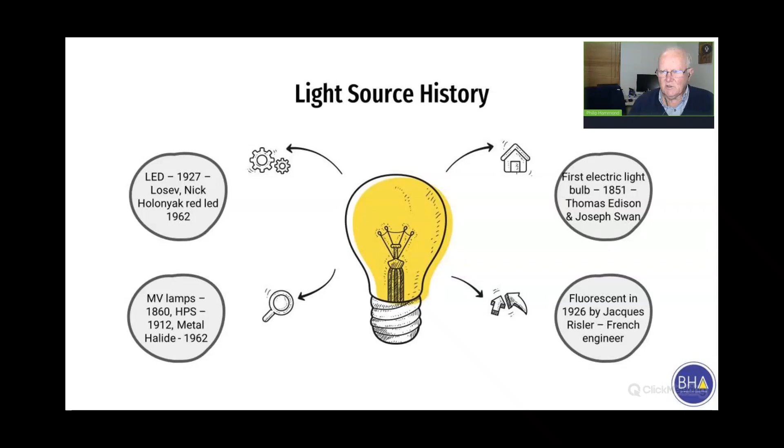And then it went on, and Nick Holonyak, who was working for General Electric at the time, he invented the red LED. And as you know, many of you have had little CD disc players and so on. You would remember that there was a little red laser light inside. And that is all thanks to Nick Holonyak. And that was in about 1962. Let's move on to the more modern history now.

We move on to light emitting diodes, or LED as we all fondly know it. The first modern LED was developed, it's a blue light, intrinsically blue light LED in its natural state before applying any phosphors to it, was invented by a Japanese gentleman, Shuji Nakamura, and it was shared with Akasaki Isamu and Amano Hiroshi, all Japanese material scientists. So, as material scientists, they invented the LED using certain chemicals to create it.

By 2010, the LED had reached the astounding efficacy of 100 lumens per watt. And everybody said, well, it wouldn't get much higher than that. Well, Philips broke through the 200 lumens per watt by 2015. But interestingly enough, good performance LED today in 2024 delivers around 150 lumens per watt.

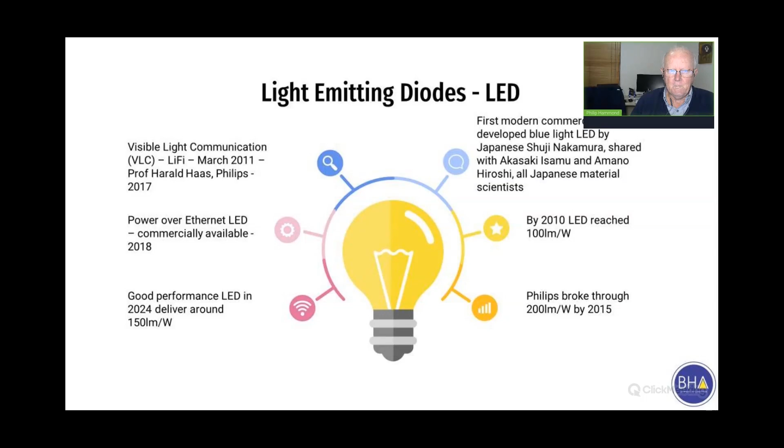So with all this in mind, and we're talking about energy efficiency, one of the reasons that we want to do it, and there's this drive to do it, is because of the energy costs. If you look back at 2021, which is only 3 years ago, the cost of electricity supplied by our utility in South Africa was R1.23 per kilowatt hour. Now, at that particular time, it was a lot less expensive than overseas. Overseas markets were paying much higher costs for energy.

And by this year, right now, energy cost is R2.61 per kilowatt hour. There are many tariffs because there's a lot of time of use, and it depends on whether you've got peak demand. So there are lots of variables in the cost. But through the experts and so on, I was able to ascertain that R2.61 is the current cost per unit or per kilowatt hour. So there's great motivation to save energy because it, in fact, helps our pockets.

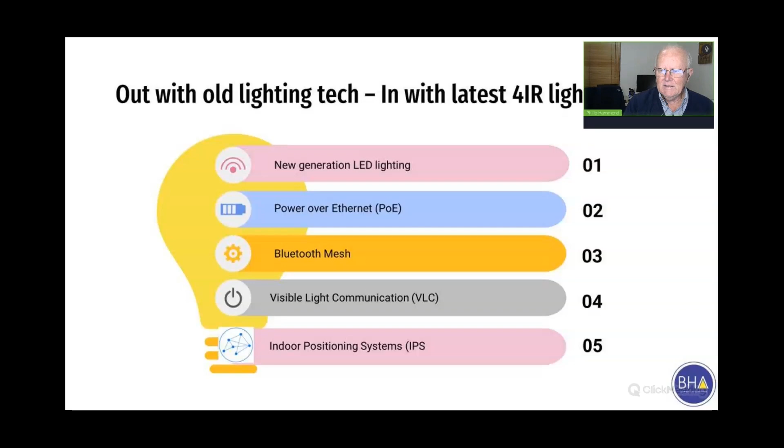Some exciting topics for this evening. But I want to issue a disclaimer right at the beginning. BHA Lighting does not sell lighting products. We are not linked or tied to any single product brand. We never compromise on quality for our clients. We are completely product agnostic.

BHA Lighting applies standards judiciously, and our knowledge of standards is excellent. And we use the highest international standards on which our standards and many other countries' standards are based. We not only know the tables that tell you what lux level you should have, maintained lux level, we also know the fine detail and the content within the standards.

So let's look back in time in South Africa. In 2007, I can remember, and I'm sure many South Africans will certainly remember it, we were asked to take our old incandescent globes that we had in our light fittings at home to a shop, any shopping mall. And there was a table with Eskom staff, and they exchanged the incandescent lamps for compact fluorescent lamps, or CFLs as they are generally known. This was the first big energy saving campaign.

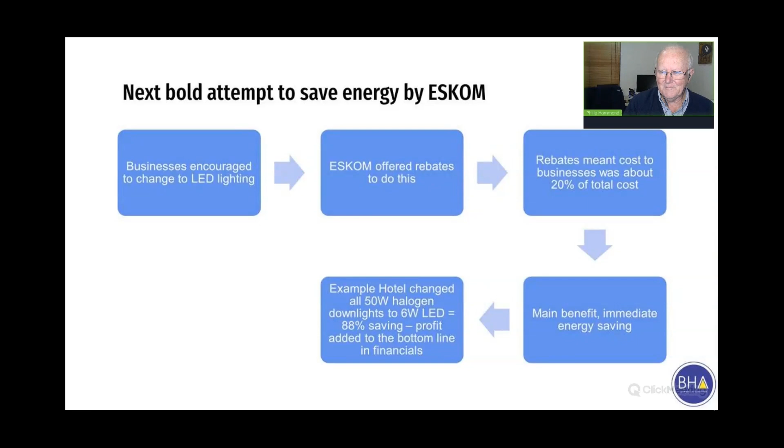But there's another way that we can save energy without really doing much, if only everybody would know how the standard works. And if you use the international standard on which SANS 10114-1, the latest version, the 2020 version, is based. It's based on EN 12464-1, which is the international standard.

There are 3 particular areas. The lux level in the standard specifically addresses the primary task area. And the primary task area on most people's desks varies between 1/2 and 1 square meter. So that is that tiny, let me just get a pointer up. That is the area there.

That's the primary task area. So when you talk about you need to have 500 lux on the task area, that's the area that must have 500 lux so that you can do your work efficiently.

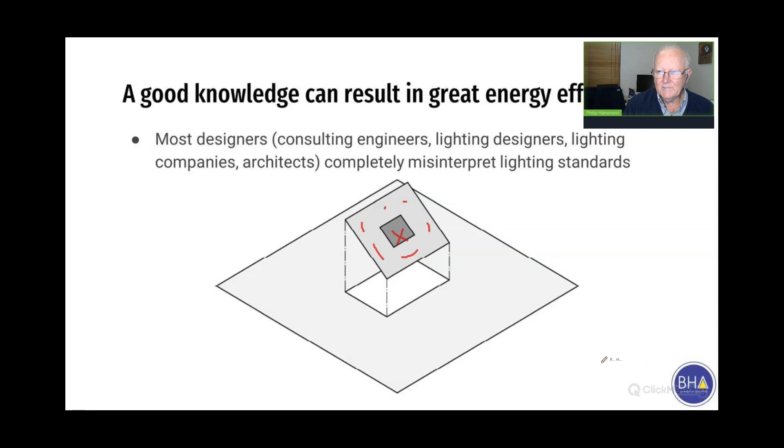But this area, the secondary area, that area can be lit to 60% of the primary task area. So to make it very simple, if the primary task area had to be 100 watts, the area around it could be 60 watts. All right, just to give you an idea. Or 60 lux, not watts.

Then this area, this greater area around here, is what they call the ambient area. And that area can be 20% of the primary task area, but not less than 100 lux. So if we apply our minds, there's an instant way to save energy by lighting spaces correctly.

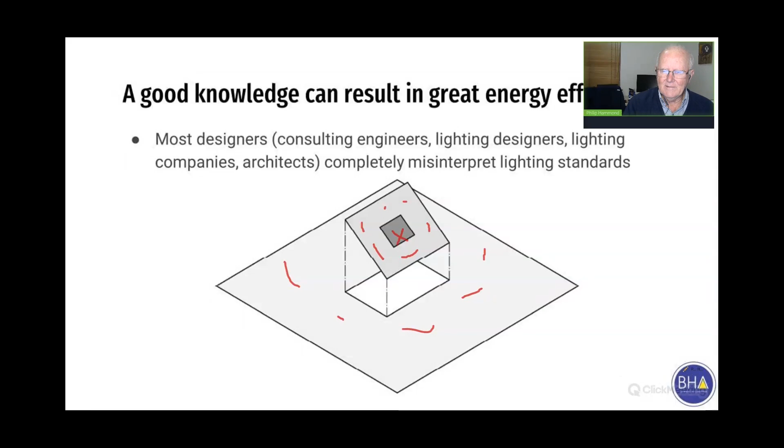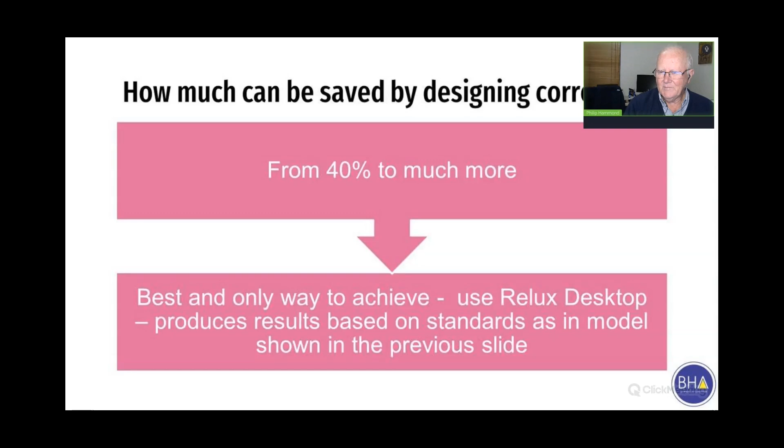So, how much can be saved? We need to quantify it. You can save from 40% and more by doing correct lighting design. The best way, and really the only way, to achieve this when you're doing lighting design using software is to use Relux Desktop. It produces results based on the standards. You can set the standards in the software, as in the model shown in the previous slide. Previous slide, that one.

So let's look at the first technology. The first technology we're going to look at is power over Ethernet. Why is power over Ethernet something that helps us to save energy? It's very simple. If you take an LED device, an LED light fitting or luminaire, it has a driver. Because we are powering it normally with 220 volts, it requires a driver to convert from 220 volts to DC current to drive the LED. Because the LED is a DC device, direct current device.

So if we are able to cut out the driver for the operating of that LED, we are able to save the power that the driver would consume to drive the LED. So there's another area of saving. Now the beauty is we can power all of our lighting using Ethernet cables. The same cables that you provide data with from computer to computer, from telephones. Telephones also use fiber nowadays over the Ethernet.

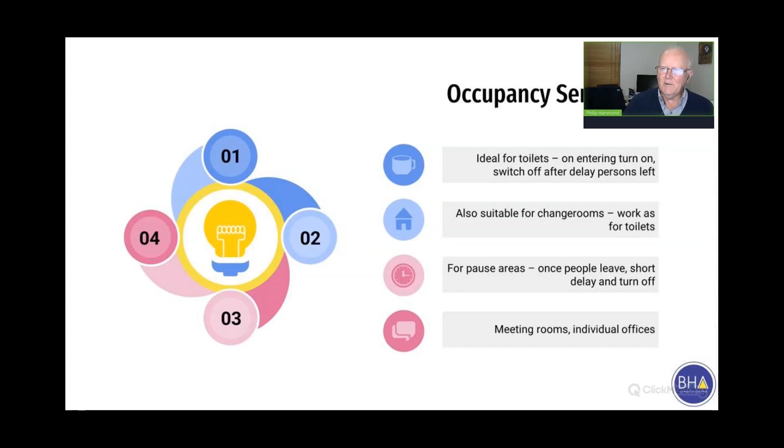So let's summarize our savings so far. And please, you must remember, this is not a linear saving. So if you save 60% on your switch from old technology lighting to LED, and then you apply the standards correctly, and you get a 40 to 60% saving, it doesn't mean to say that you've suddenly got 120% saving. Once you've put your LED in, the next saving is a saving on the use of the LED. All right, do you follow? So it's a non-linear progression of saving.

Power over Ethernet, you'll get between a 5 and 10%, depending on the type of luminaire or the lamps that are involved. Occupancy sensing can produce around 40% for those areas that are fitted with occupancy sensing. Remember, not every area is suitable to use occupancy sensing.

Right, so let's move on this exciting journey. So let's look at daylight calculations. Here's an area that we can certainly save money. And obviously, the material I'm showing you is for South Africa in the southern hemisphere. If you're in the northern hemisphere, it will be slightly different, because obviously you'll look south rather than, we like to look north for a sunny environment. And also in the northern hemisphere, you have longer and darker winters in certain parts, if you think about the Scandinavian countries.

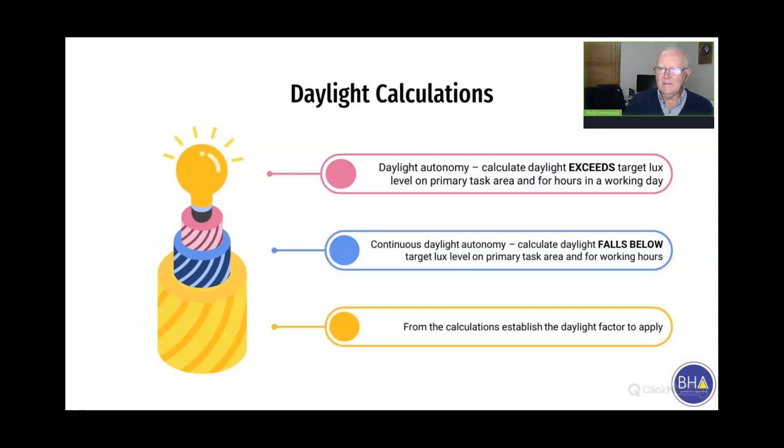The next one we look at is the continuous daylight autonomy. And that is slightly different. This is where the required lux level falls below the level that we require and for what working hours. Why is that important? Because in the first instance, where it exceeds the target lux level, we can actually do without the electric lights, the artificial lights. But where it falls below, that means we have to turn the lights on. Right. And there are various things we can do for that. And then, of course, in the process, we calculate our daylight factor to see what the daylight factor is going to be. So let's look a little deeper at this.

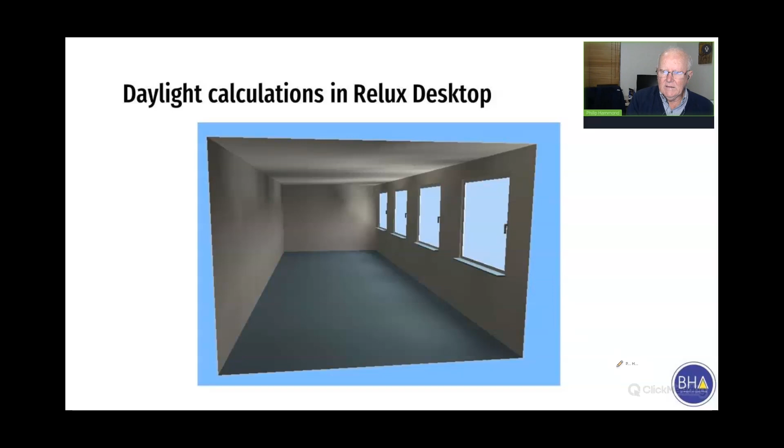In preparation for this evening, I made up a model in Relux Desktop, and the model is quite simply 10 meters long and 4 meters wide, with windows all on the north face. They're the large windows on the north face. So let's have a look and see what the result was. There it is. I'd set the target data for 500 lux, a daylight factor of 5, 9-hour day, and 5 days a week.

And look at the colors at the bottom. For the daylight factor, this is the daylight factor and not lux levels. All right. And you'll see that where it's this dark purple, that's between 1.5 to 2 daylight factor. The lighter purple is between 2 and 4 daylight factor, and between 4 and 7 in that red color, and between 7 and 12 there, and even higher between 12 and 20 in these areas directly at the windows. All right.

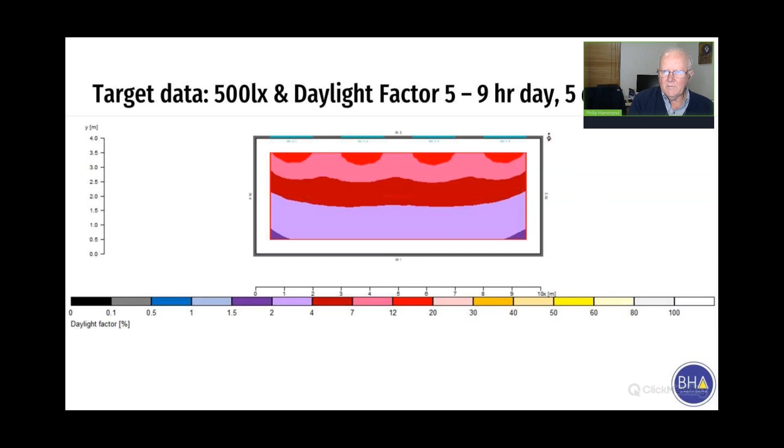So if we have a look at what the data says, the algorithm that we use was average indirect fraction. We calculated an evaluation surface height at 0.75 of a meter, and it was for a CIE overcast sky. You can see the date and the time, the location, coordinates, north angle, it was facing north, and the average daylight factor was 5.7. The median was 4.7. The minimum was 2, and the maximum was 14.4 daylight factor. So we now have all of the data that we need to continue.

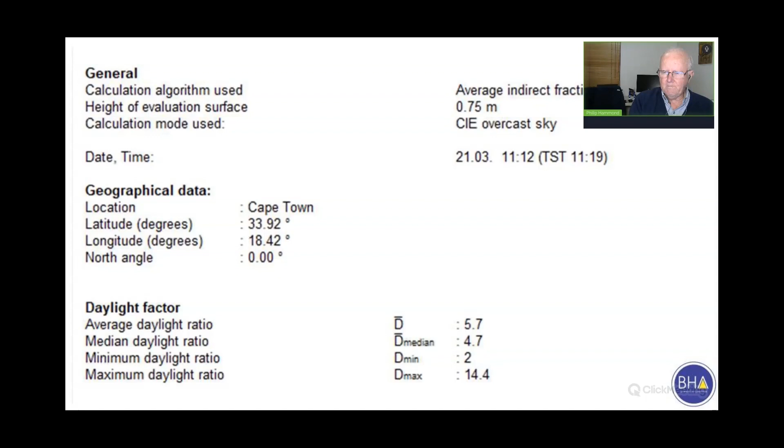Now we can look at the lux levels that we achieved in the same model. And if you have a look on the scale here, the lighter green is between 300 and 500 lux. So in that part of the room, we'd probably need to put the lights on a bit sooner. Then the next shade of green is from 500 to 750. That's this darker shade. Then this darker blue color here is from 750 to 1,000 lux. 1,000 to 1,500 lux. So you can see it's really high when we start getting across here. Again, it's 200 to 300 lux right at the wall.

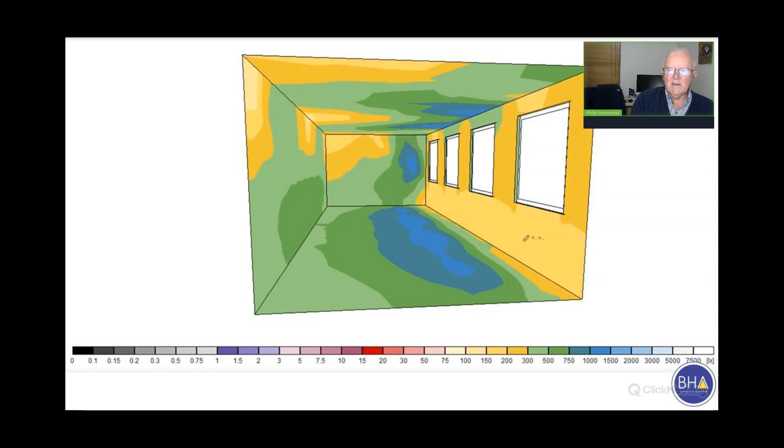Okay, so this is the effect, and you can see it on the walls similarly, and how much light there is on the ceiling even. And you can see that this wall is lit slightly less, between 200 and 300 lux. Now, quite clearly, if the room is that bright, and you can see it again here in the colors, all right?

If a room is that bright, we would have to do something to mitigate for the glare for a start, and shining directly into the room. So we could have vertical blinds. There's a whole lot of solutions that you could apply for that. You could do tinting on the windows from a very light tint to quite a heavy tint, because you also have to think about the R factor. It's the thermal factor, what it's going to do to the temperature in that space. You might have air conditioning, but still there will be an increased temperature.

Do you have double glazing? So there are a number of things that will influence the comfort in the room itself. So we're not responsible for that part of it, but we can give input to the design team that we're working with to cater for that, so that the occupants enjoy comfort and their well-being is being looked after.

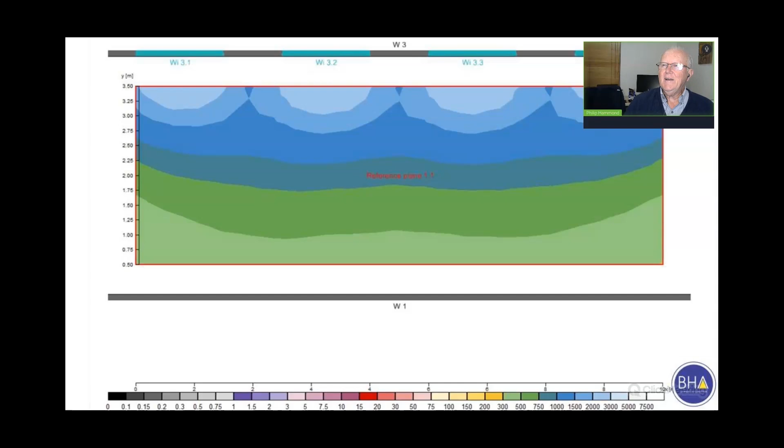So one of the first things we do is we have a look to see, what does natural light do for the space? So that guides us towards the appropriate light fittings. It guides us towards the technology that we're going to use, which we're going to talk more about as we proceed through this, to in fact cater for lighting in spaces where you have lots of natural light.

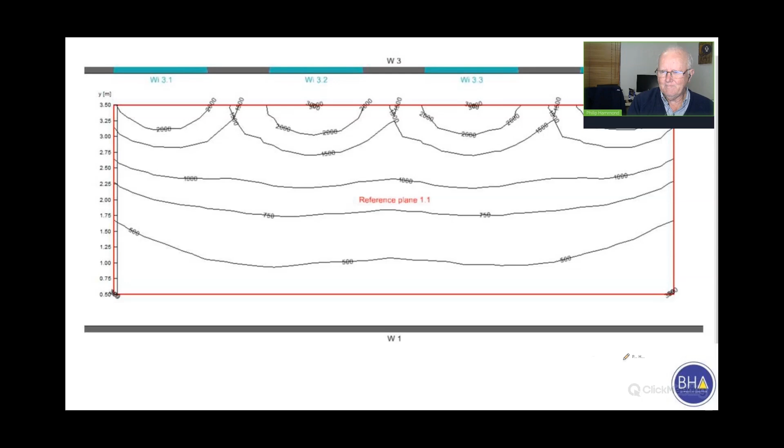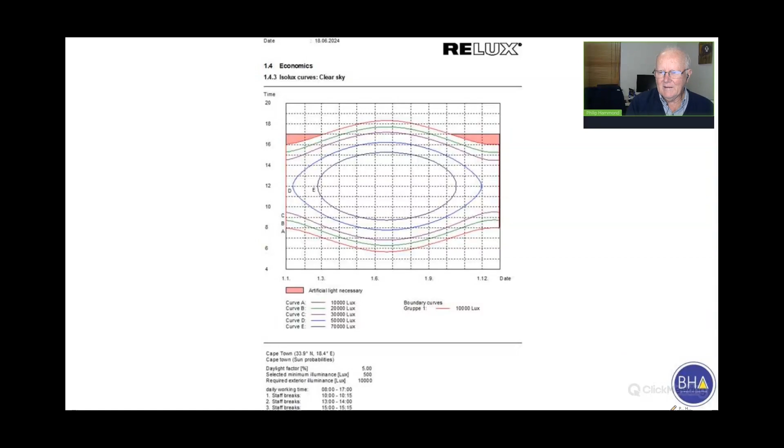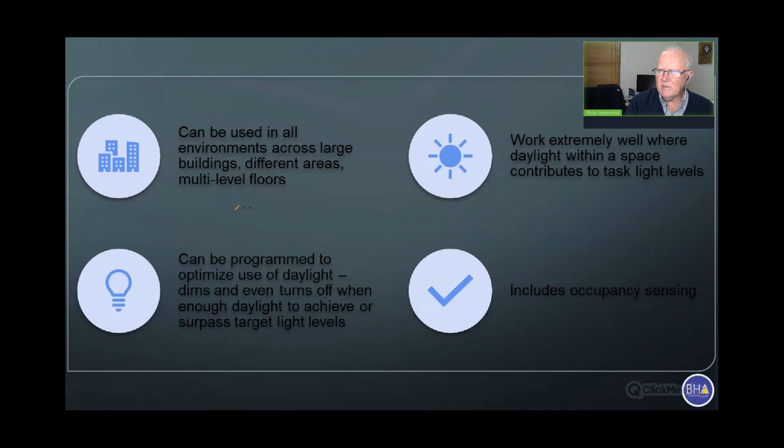So if we have a look at this, daylighting can be used throughout large buildings. We're now talking about Bluetooth mesh. So we can use it in environments with large buildings, different areas, multi-story buildings or multi-levels. It works extremely well where daylight is within the space, and it contributes to task light levels.

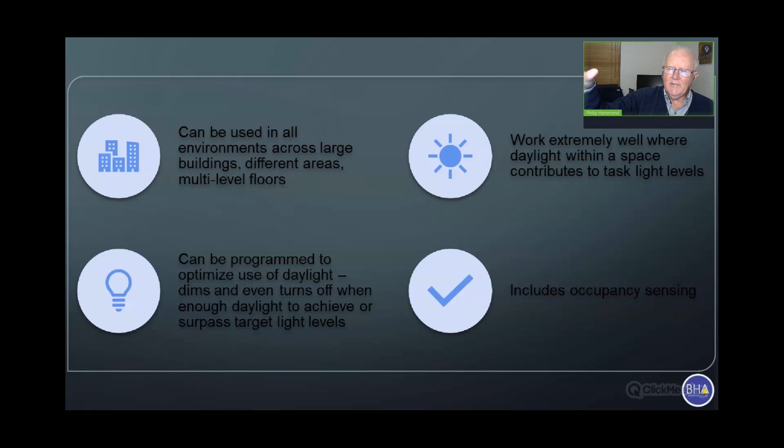We can in fact program it for occupancy sensing, and we can also program it for daylight harvesting. So when there's sufficient light, the lights will dim down, we'll use less electricity with the lights dimming down, and if there's sufficient, it will even turn off. And when the light is insufficient, the lights will brighten up again and they'll return to full operation. It is fantastic technology. We have used it extensively and it really pays off.

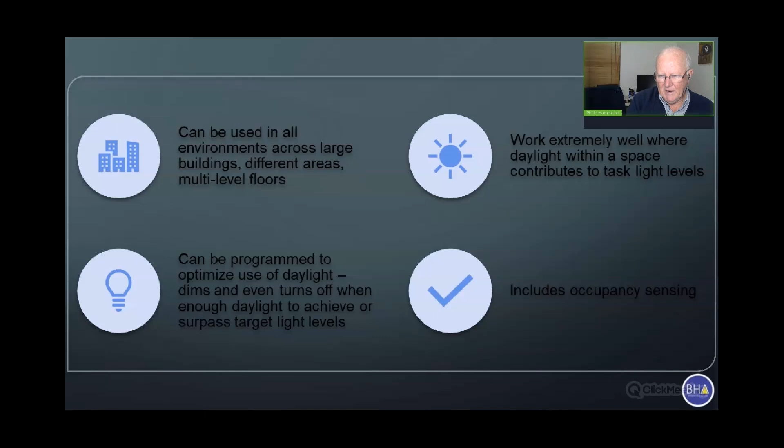Let me give you an example. A factory that we do a lot of work at. We've been working for this particular client since 2021, and we'll still be working for them up to, at this stage, my projection is about 2026. They manufacture equipment. We have completed about 60% of the factory so far. There are other buildings within this particular client's portfolio that we are also doing lighting design for, and that's going to come off over the next year, 2 years.

We've used Bluetooth mesh throughout with daylight harvesting and occupancy sensing, and a percentage of the luminaires are also fitted with emergency control gear. In the event of emergency, they're able to stop machines, they're able to safely evacuate the area, and so on. This image here is of the final assembly line, and there are a total of 54 luminaires across 3 bays.

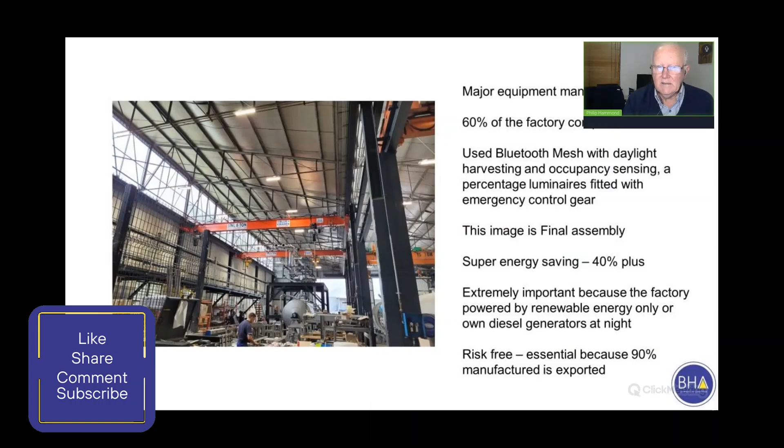The entire factory roof is loaded with solar panels, and they have two very efficient diesel generators that they use at nighttime because they work sometimes right through till midnight, and on occasions right through until 6 o'clock in the morning. For them, they find it's risk-free, it's essential because 90% of what they manufacture is exported around the world.

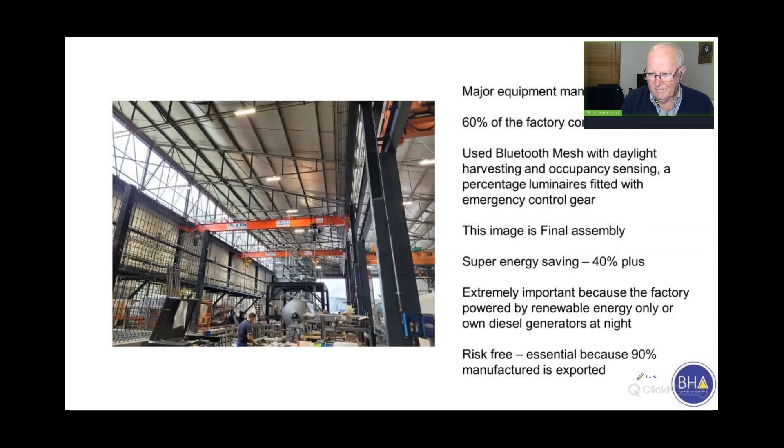All right, so that's a classic example, and we've done different areas throughout this factory, which has made it very efficient because they all link up on the same Bluetooth mesh. Not different Bluetooth meshes, on the same Bluetooth mesh. So you can add all devices to the mesh: cameras, lighting, CCTV cameras, and all sorts of other sensors as well, including smoke detectors and more. It produces a monthly energy usage and energy saving report.

Daylight harvesting is set up according to the target task area light level that is required. Obviously, the task area in the factory varies depending on the machinery that is being manufactured at that time. As daylight fades, the luminaires automatically brighten up to full output to produce the required light level in the task areas, particularly at night time when they're working.

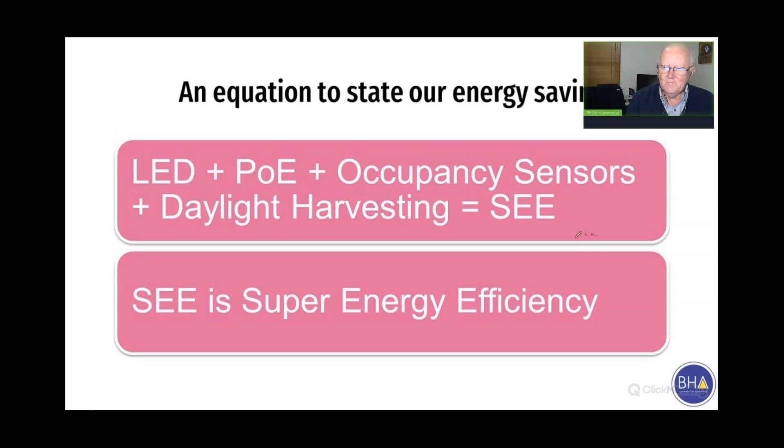So we should be able to state an equation, because in whatever we do in lighting, we're able to perform, do, and check mathematically. So if we add LED plus power over Ethernet plus occupancy sensing plus daylight harvesting, we get super energy efficient lighting. It's as simple as that. The problem that most people have is they see a technology in isolation. It's LED. Or you can add an occupancy sensor, perhaps, in some places. All right? But not many people take it to the next level, to the next step, to be most effective, to get ultimate savings.

So, is that the end of the fourth industrial revolution technology? No. And I doubt if what we even have at the moment is all that we're going to have, because certainly technology continues to evolve. New technologies suddenly emerge, which is the exciting part. So in the technologies that we've got, we're going to talk specifically about visible light communication and indoor positioning system.

But in addition, I draw your attention to Amrax Metaroom, which is the ability to scan internal spaces, including the furniture and the fittings, and points of interest, smoke detectors, air conditioning ducts, return ducts, etc., using an iPhone 12 Plus or an iPhone version higher. I have an iPhone 15 Pro Max, and I'm able to do scans of any space, but especially where we can't get DWG files, for example.

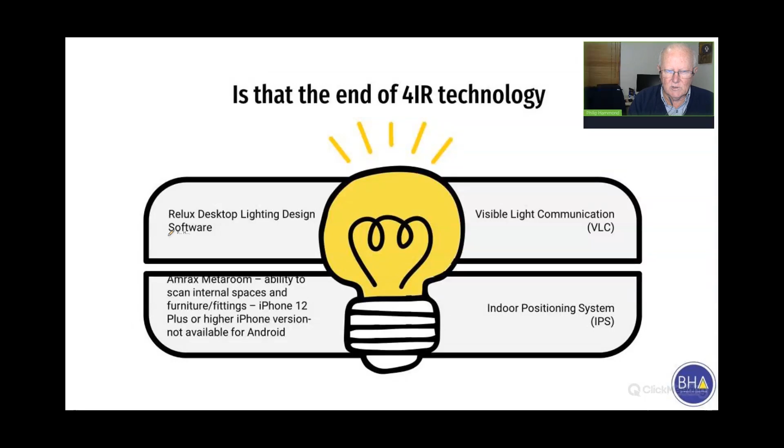And then, of course, we're always thrilled and excited to use Relux Desktop for our lighting design. It's unbelievable software. It just gets better and better. All right. There's an add-on that's just been released, which is to be able to calculate obtrusive light in the outdoor space. Right.

Visible light communication is very interesting. Luminaires form part of your Wi-Fi network. So they act as a point of connectivity. So you can have a sensor which gives you the ability to make your luminaire part of your network, to transmit data, to extend your Wi-Fi network.

Especially equipped luminaires for Li-Fi, not Wi-Fi, Li-Fi connectivity, where they transmit data up and down using the visible light spectrum. This is amazing technology. It's very secure because light doesn't penetrate walls, doesn't penetrate glass if you've got blinds on your windows, so people can't link in as they can to Wi-Fi if you've got unprotected Wi-Fi, which you shouldn't have.

So it's absolutely fantastic. The visible light spectrum gives 10,000 times greater spectrum than RF or radio frequency spectrum, which is used for Wi-Fi. So it's amazing. And on top of it, it's able to transmit data up and down at the same speed, anything from 10 gigabytes per second to 100 gigabytes per second. Now, normally you measure the transmission of data in megabytes per second for Wi-Fi. Everybody will tell you everything about megabytes per second. But here we're talking about gigabytes per second.

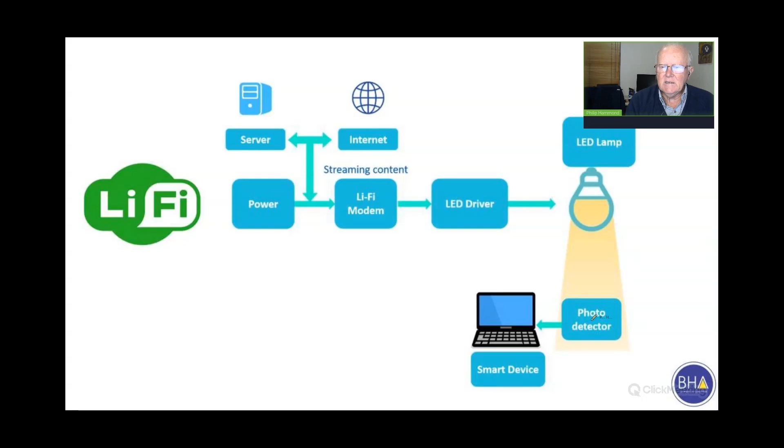So if we're using Li-Fi, you have your normal file server or your computer, your connection to the internet, and your power switch goes through your Li-Fi modem. You'll have a Li-Fi access point, through the LED driver, through the lamp, and your computer or device has a dongle. Some computers are now being fitted for Li-Fi, but if not, you'll have a USB dongle that you put in there, much like a USB stick, which has a photo detector and so on, and it converts it and sends it through.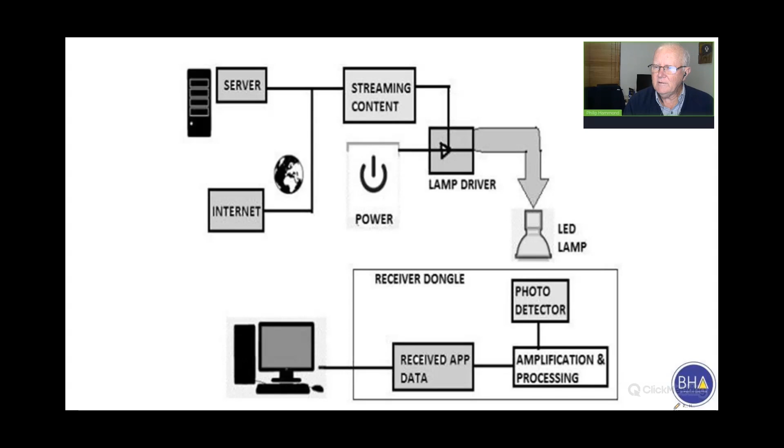And as time's going by and it's becoming better and better, the prices have started to come down from where they were originally. They were originally quite expensive, but now it's coming down. So ideally, you could set this up for your executive suite in the offices of directors and so on, and that would really be tremendous.

So the next one we'll look at is the indoor positioning system. We all know about GPS. We understand GPS. We use it. We drive on Waze or Google Maps, whatever it is, to get to our destination. All right. But what happens when we walk into a shop? We walk into a building. Our GPS dies because we can't access the satellites.

So we have indoor positioning systems, which is our GPS indoors. Okay. It makes use of Bluetooth beacons or RF tags, radio frequency tags. So you can fit a tag to a chair, whatever the case is. So you can do asset control. It uses trilateration. In other words, it needs 3 points to determine your position. All right. It's ideal for supermarkets, shopping malls, hospitals, airports, museums, galleries, asset tracking, and various other things.

In a hospital, they want to find specialist equipment, life-saving equipment, and it was in use somewhere else. They want to find where it is. They need to get it very quickly. Using this system, they can track it and quickly retrieve the device. So it's really very exciting.

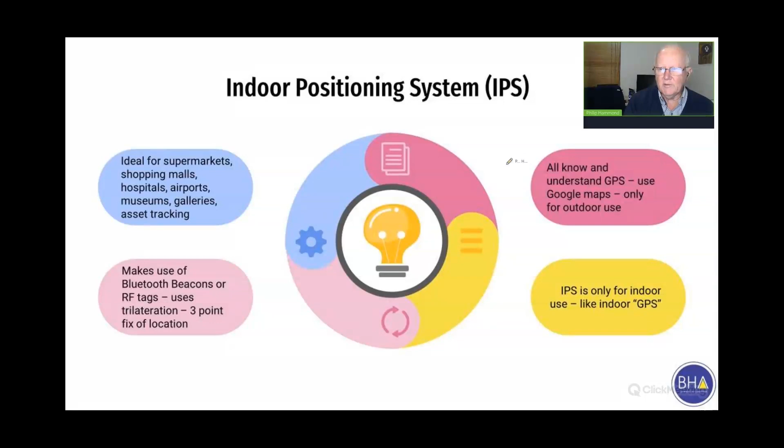So it's smart devices, not necessarily to save energy, but it will certainly save people time when they're shopping because they don't have to go and look for the items. It will tell them what route to follow to do their shopping quickly and effectively.

Right, in a shopping mall, for example, instead of going to the big device and pressing on the screen like 1,000 other people have done already before you, and then you haven't washed your hands. In times like the pandemic, you wouldn't want to do that. So instead, you have it on your device and it will tell you exactly where you are. And you can, in fact, navigate as you're walking with it on your device. So it's like Google Maps indoors. All right.

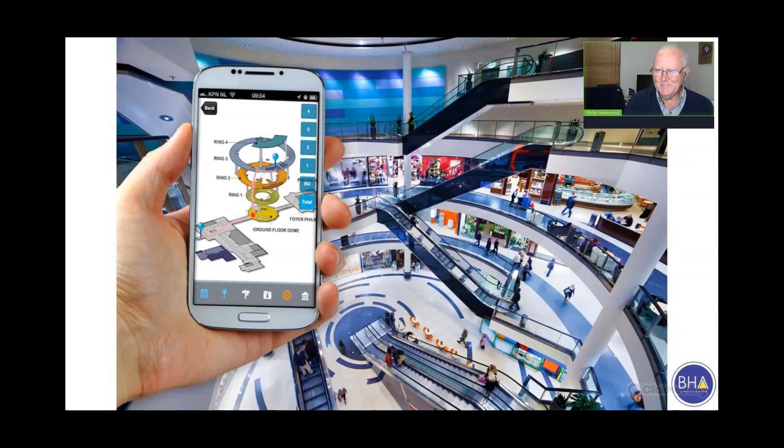So let's summarize. And once again, remember, using all the savings per item does not give you a linear saving. Each one enhances the other to deliver super energy efficient lighting. So, in the first instance, we changed old technology to LED and we save 60% or more on the conversion. With correct application of standards, we can save more than 40% if we do it properly. Occupancy sensing can save an additional 40% in those areas where you use it. Power over Ethernet can effectively give you about 5%, conservatively.

Daylight calculations, if sufficient, can mean that you can save using the artificial light altogether for periods of time, or only supplement it with some of the artificial lighting. And then Bluetooth mesh can bring about additional savings with the daylight harvesting, occupancy sensing, and so on. So all of those things put together make up super energy efficient lighting.